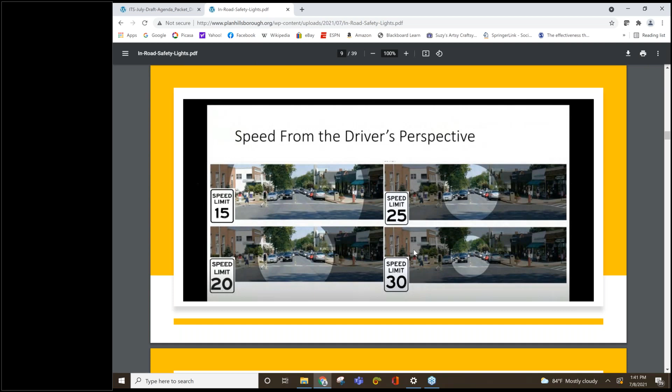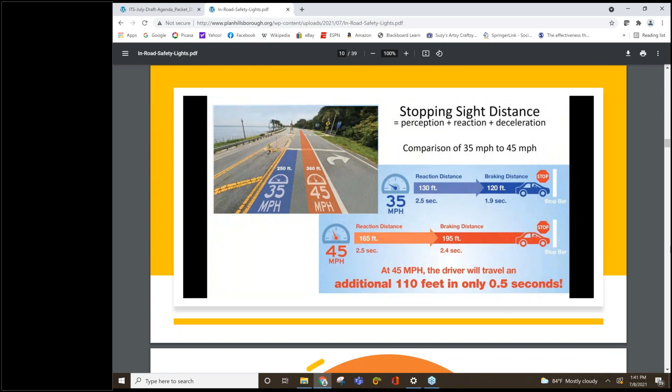In addition to the cone of vision, they have to have sufficient time to be able to stop. At 35 miles per hour, at 45 miles per hour, this is the distance that the driver needs - that's when they actually see the element in front of them. So this distance is very critical, because by the time they notice something, it's too late. We need to have the combination of that area of vision and also sufficient distance for them to stop.

So that's why we believe that conventional tools are not getting the job done. A perfect example is that many reports have been done recently, and conventional tools and design parameters that we're currently using are really not moving the needle. So we really need to start looking for new ways to be able to explore solutions to communicate better with the driver.

So innovation is a way to be able to communicate with the driver. That's what we are recommending here. We are also looking for tools that are self-educated, that are really very clear to the driver to know what they are dealing with. There are many other elements we are dealing with here in terms of quick installations, cost-effective, low maintenance, and then we are looking for sustainability.

The products that we are going to discuss here and the applications are FDOT approved and MUTCD compliant. We are proud as a state of Florida - we are the first state in the country to have these kind of tools being approved to be used on our streets and highways. So we are the pioneer state in this effort.

So combining the elements that we just discussed, I want to start first talking about pedestrian communication with the driver. This is that cone of vision, this is what the driver sees, and this is the distance that needs to be at least, to be able to stop. So we need to have 250 feet to be able to see that the pedestrian is crossing the roadway.

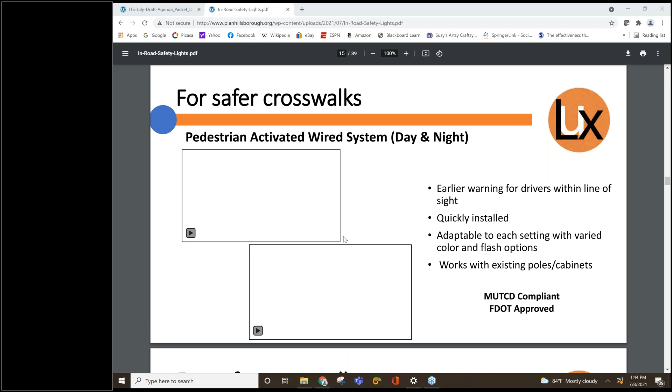I guess for this here, there are two videos I was going to show you of the system, but I don't think this is working right from your end to activate those videos. I will have to try it in PowerPoint presentation. I think when I converted it into PDF, it was not pulling up.

Give me a second. Yeah, sure. Yeah, the presentation, like you said, was a large file. Yes, it is, because the videos. Give me a second, it just opens. Sure, I apologize, I wish I had access to it. I'll make it easier on you. Oh, no, it's okay, fine. It's not a problem, I apologize for the delay in the time to open it.

But let me quickly advance to this one. I think it was around slide 12, 13, right? There you go, let's see. Oh, can you all see the screen now? Okay, thanks.

So the one to the top, that was in Escambia County where we did the application, and it is an existing RRFB system that we replaced with LED enhanced signs. We added in-road lights. The one in the video below it is in the city of Pinecrest area, and it is a combination with RRFB. That system has been in existence for almost 3 years now.

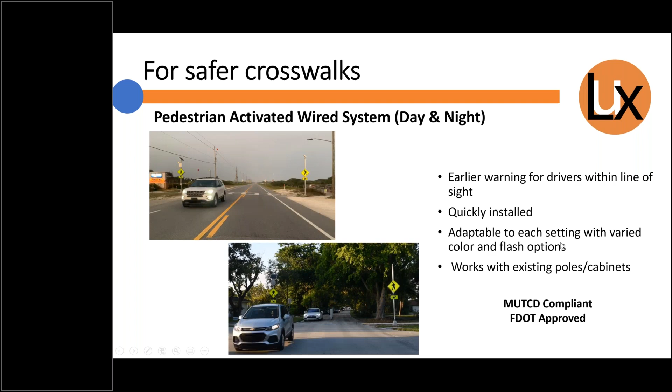This is, as I mentioned, the highlighted crosswalk. We can go to the next one.

This is a new idea that we are right now implementing, part of the innovation that we're discussing with District 5 in Orlando and central office. We're introducing red in-road lights at mid-block crosswalks combined with a HAWK system. This is the first in the country we're going to be doing that, so it's a new experiment we're working on with FHWA. There are about 8 crosswalks on Orange Blossom Trail in Orlando that will be using this combination.

Also, with this combination, we just got authorization with Hillsborough, with the Tampa Expressway authorities, on the reversible lanes where the gates are constantly being hit. We are going to be putting in-road lights just like that, but they will activate when the gates go down, and then be dark when the gates are up. This way, hopefully, it will provide better protection for the gate system. There is a video here, Bishka, you can play it please.

This idea, even though shown here with green, is from a different country where we started this process. The idea is to be able to look at many applications, like for railroads and for wrong-way applications. There's endless possibilities where we can use it, and signalized applications like for red light runners if needed, school zones, many applications we can use it for. But now we're introducing the steady red as an application in the streets, which is an amazing application.

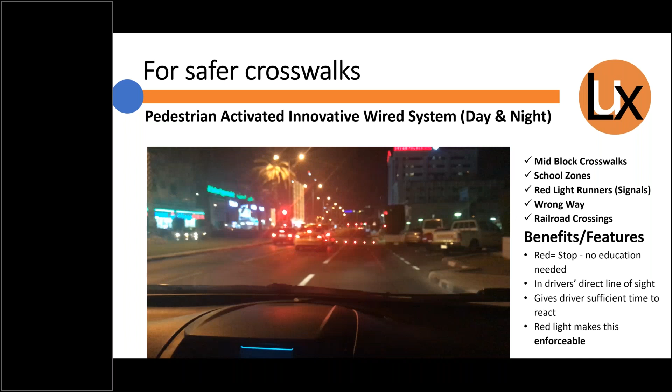That's what I mentioned to you about the combination with the in-road lights, where we are going to have flashing yellow at the beginning, then steady yellow, and then steady red in combination with the overhead lights, to allow for pedestrians to cross those mid-blocks on Orange Blossom Trail.

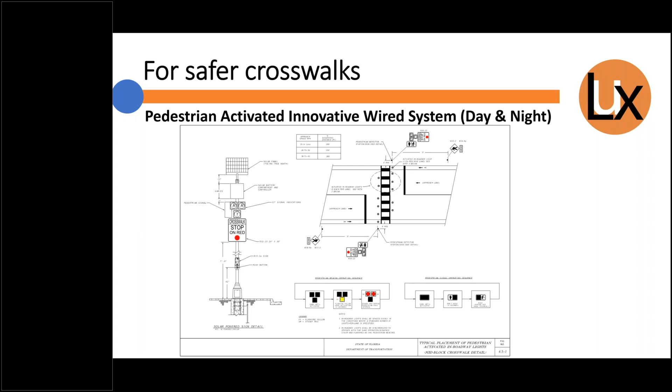Bicycle lanes, vulnerable users also - we have to be able to illuminate them and provide better protection for bicyclists when they're on the bike lane at nighttime. Most bicycle fatalities happen at nighttime. The white lights are placed in the bike lane, and you can envision a bicyclist with the red taillight in between the white lights, visible from 1,000 feet. This provides better protection, knowing that there is a bicyclist in the roadway.

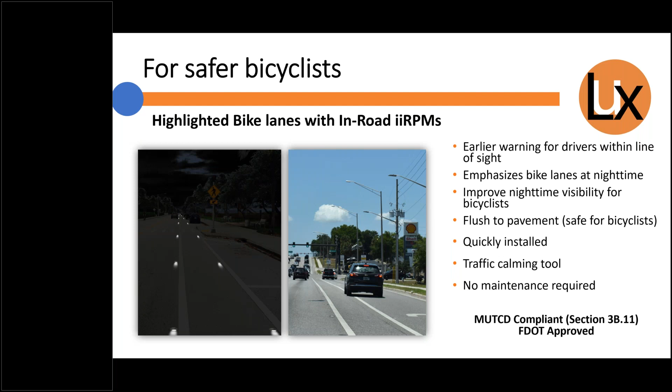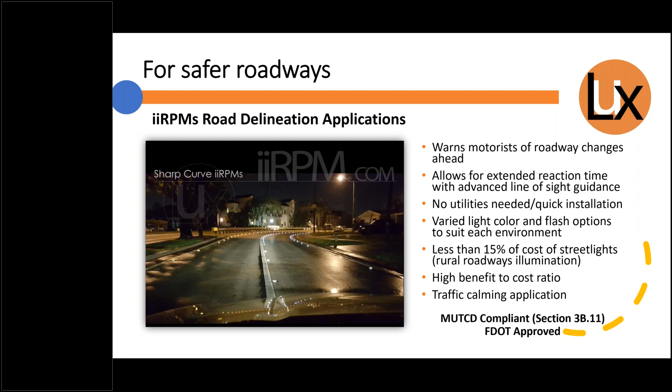This video is from the Florida Turnpike, mile marker 166, installed last year. There's a major problem - this is a dark roadway, and the curve has numerous roadway departure crashes. We took this video from half a mile away, traveling at 70 miles per hour without using our headlights. That's how we can navigate that curve very easily. It's definitely a very effective way to highlight and show the curve throughout those dark areas.

Wrong way application - I'm sorry, you can go to the next one. Oh, no worries, yeah that's good. Next slide, please.

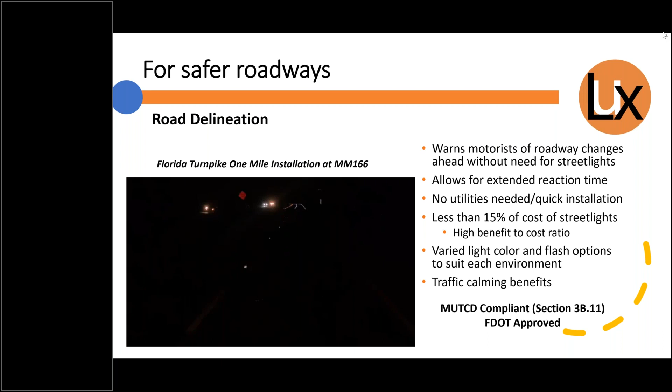Wrong way driving is a perfect example of distracted driving, aging drivers, or intoxicated drivers - they really can't tell the entrance from an exit on the ramp. It looks almost the same, and they could potentially enter the wrong way. So our objective is to create a gate system with in-road lights placed facing the driver, telling them from a distance that this is the wrong way to go, right there in their eyesight.

This application is very effective because it's active all night long. You don't have to wait until someone is in the zone to communicate with them. It's placed in the lanes for drivers - if you go the right way, you see absolutely nothing, and if you go the wrong way, you're going to see a bunch of red lights.

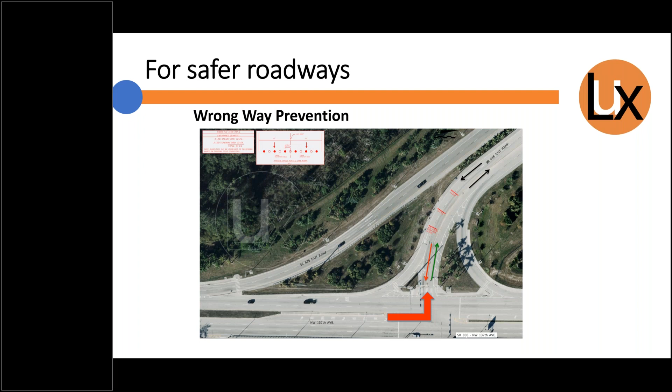That's how it looks - right next to the wrong way signs. It's a preventive way of being active all night long, so drivers can distinguish the entrance from an exit, and it can be used at many locations.

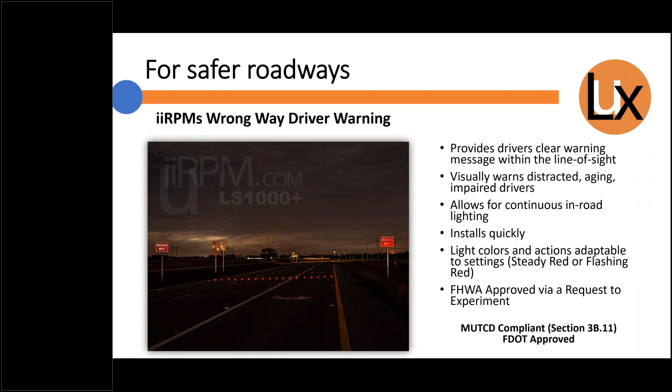This location, for example, we did in a rural highway up in the Fort Pierce area in East Florida for District 4. It's so dark there, and it's a large median - someone went the wrong way, and two girls lost their lives. So we placed this gate here to provide a better warning that can be seen, as I mentioned, from easily 1,000 feet, 2,000 feet.

Roundabouts, even though they are a very effective way of providing better protection for severe crashes, there's still a lot of problems with people hitting the roundabouts, hitting structures, and traveling too fast into them. So we have placed many roundabouts in the city of Miami Gardens, and this is also in a private development, where we placed the roundabouts to guide and warn drivers through the roundabout to navigate very easily.

Next one, please. How many islands, traffic separators that we can't see at nighttime also become a hazard. So this is also to be able to illuminate them and to warn vehicles of those areas. Next one, please.

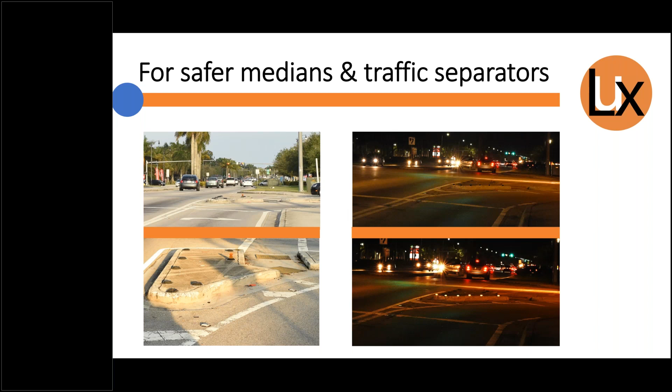Speed humps, speed tables, and as I mentioned already, incident management and railroad crossings, like I mentioned before. So many applications, and really I just wanted to give you a thought of how many applications we can use and what we have used so far. Our main objective, obviously, is to be innovative and try to warn drivers and reduce crashes. Next one, please.

What we have is a product that is 1.5 inches in depth that is placed inside the pavement. As you can see, this black composite cup becomes a permanent part of the pavement, while the cast aluminum and the module inside it that houses all the components can be ejected for maintenance or future milling and resurfacing projects. But most importantly, we have a one-piece module inside to protect from moisture, and that one-piece module can be placed practically in a pool, and it will survive and work out perfectly to protect the components. Next one, please.

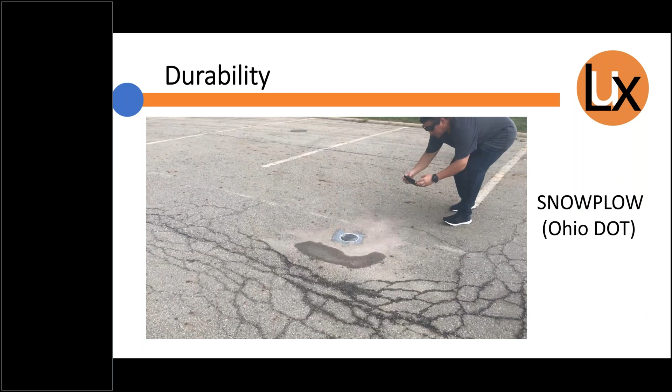Next one, please. We have many studies that have been done on the use of in-road lights. Two of them are related to us, and we are very proud of them. The Florida Turnpike, that 1 mile I showed you, the curve delineation, we did a before and after study with the cooperation of the Turnpike.

Another project we did, District 2 did up in Jacksonville. They have a reverse curve in the neighborhood, and we installed the lights. The 5 years before the installation of our lights, there were 56 total nighttime crashes, and in the 3 years after we installed the lights, combined, there was only 1 nighttime crash. So we are definitely on the right path of saying that we have a tool to help reduce crashes and also hopefully reduce speed. Next one, please.

Many references that we can share with you about the benefits of in-road lights. Next one, please.

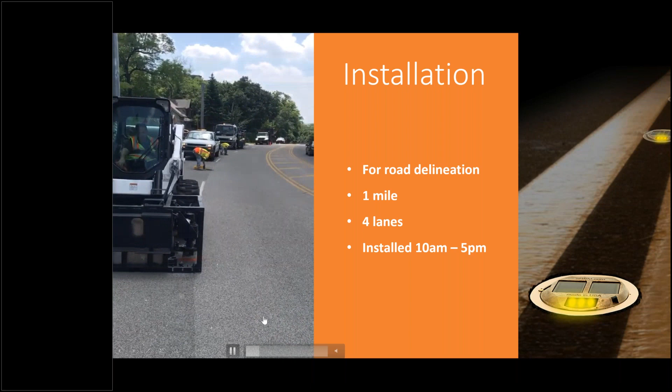This is also a video of the installation. We had to invest into the installation because the process involves drilling to accelerate. This is actual live operation, so we are drilling within 30 seconds. We drilled the hole to 1 3/4 inches. It's preset, the material is pulverized, and the person behind cleans up the debris, which can be thrown away because it's almost dirt.

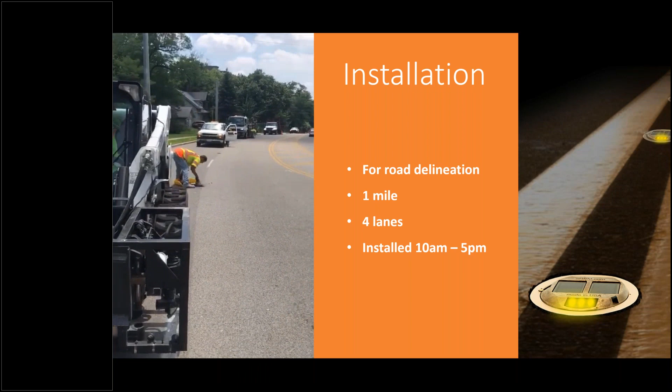But if it's in a neighborhood, we can accumulate it and then vacuum it. Then the person behind that, at the end, puts the epoxy material. It's a very effective epoxy—I'll show in the next video. Then the unit is placed, and within 10 minutes you can drive on it.

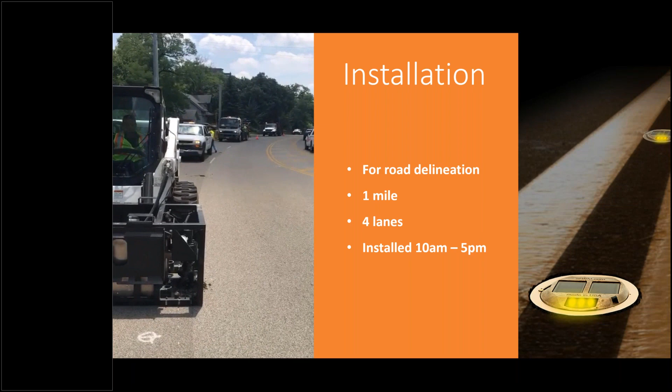As you can see now in this video, another hole has been drilled. Okay, next one please.

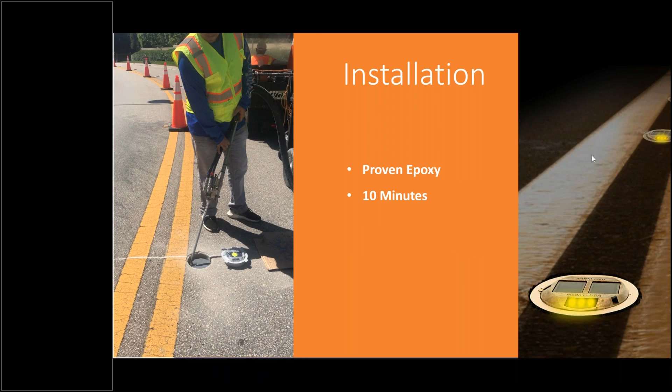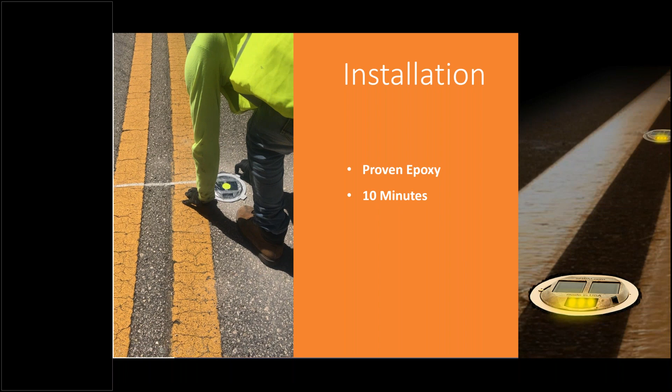This is the epoxy. This is a hole as it's being cleaned. The epoxy is a 2-part epoxy, and the unit is placed right there, and you have time to be able to adjust it, and then that's it—you're out there. Next one please.

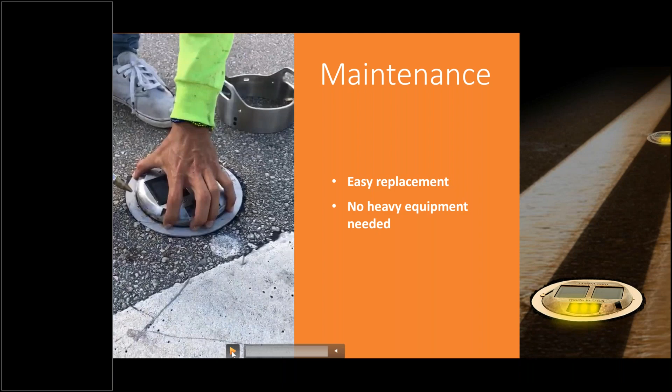This is part of the ease of maintenance: if we need to eject the unit, we use an air compressor that injects air inside the unit, and the unit pops up, and we'll be able to go ahead and come back and replace it. If you need to mill and resurface, which we've done on several projects, they eject the unit out and just come back, buy a new cap, and place it in the pavement at that time. You have to record it, obviously.

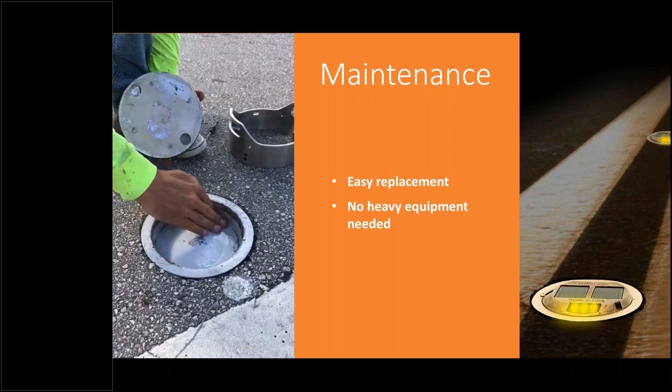This process, even though it seems easy here, is definitely not something a person can vandalize easily. We haven't had any problems with anyone being able to tamper with the units in the field. Next one please.

Our goal, obviously, is your goal too: to be able to address many areas of concern. We believe that throughout the state and throughout the country, we can reduce crashes, and we have many applications where we can be innovative in reaching out to the driver more effectively. As we all know, pavement shields on the highways have been very effective in advising drivers on which routes to take. In essence, what we're doing here is following those footsteps, providing better communication with the driver so they can see and navigate curves or be warned of pedestrians and other elements in front of them.

Next one please. So with that, I'd be more than happy to answer any questions. I just wanted to give you a bird's eye view of the applications of in-road lights.

Thank you, Will. That was a very good presentation, very interesting. Can we move on to any questions?

Yeah, Vishaga, this is Achilles. I had a question: what is the longest deployment you've had so far, in terms of time? We've been working for 7 years, and this is our 3rd generation of lights. Our 2nd generation has been in the field for 5 years.

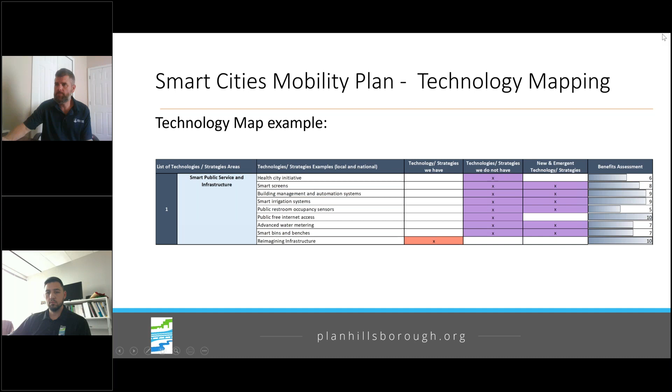I referenced the need to generate project ideas to feed the prioritization matrix that would drive the roadmap. I also mentioned the Alliance meeting we had last week, where we asked two questions of the attendees — about 35 to 40 people attended. The first question was: if you had $10 million and had to make improvements regionally, but only to existing capabilities, what would you do? The second was the same question, but only if you could add new capabilities. A number of project services and activities were identified.

Nick, I don't know if it's okay to have an open discussion now, but I'd really welcome feedback from the committee members around the projects listed on the right-hand side of the slide. Just briefly, are these the right ones? New initiatives — is anything missing? Is there anything we should be considering as a project team that needs to be added to that list as part of the overall approach? Would that be okay? Yeah, I think it's okay, if anybody has any comments or questions.

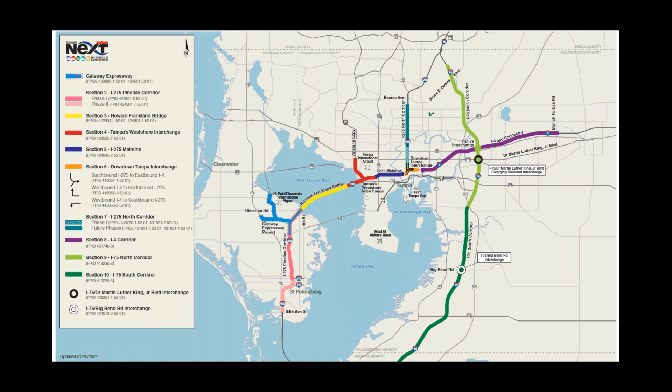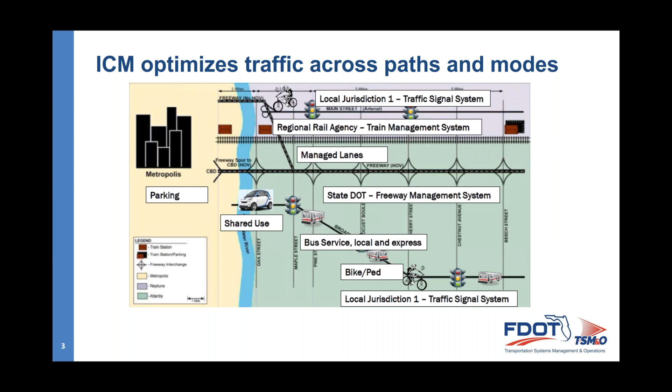Much like freeways being managed in a silo is not very effective, arterial management is much the same way, with spheres of influence that massively overlap each other. It really takes an integrated management approach for regional traffic management, both in the traditional sense and in the wider version of ICM, which this slide shows — broadening that scope to include other modes of transportation aside from just passenger vehicles, changing the focus from just moving vehicles to moving multiple modes, moving towards a mobility as a service mindset. Next slide, please.

These are just some broad strokes ICM benefits — a lot of this might be redundant to some of the audience. Hopefully reducing vehicle hour delay, improving travel time reliability through the metrics of planning time index and travel time index. And of course, the ultimate goal should always be to improve the overall safety of the region. Next slide, please.

Now I'll get into the portion of the presentation where I explain why this is not necessarily just about the Florida Avenue project. It could very well be, because a lot of this is still being actively discussed within the department — we've still got some requests we're waiting to hear responses on. So it's possible that these ICM corridors, shown on this map by FPID and main corridor, still roll out single project by single project.

But when the conversation of stimulus funds started getting brought up, and stimulus-worthy projects, we started discussing the idea of combining these ICM corridors together into a single project. Not only will we hopefully get a better economy of scale on the design or RFP development portion, but you'll get better consistency because it's a single firm writing each RFP. Given that these scopes are relatively the same — though there's some nuance to every corridor, so they'll be slightly different depending on needs and what other active projects have already completed — we're hoping we can package these together as one project and roll it out together.

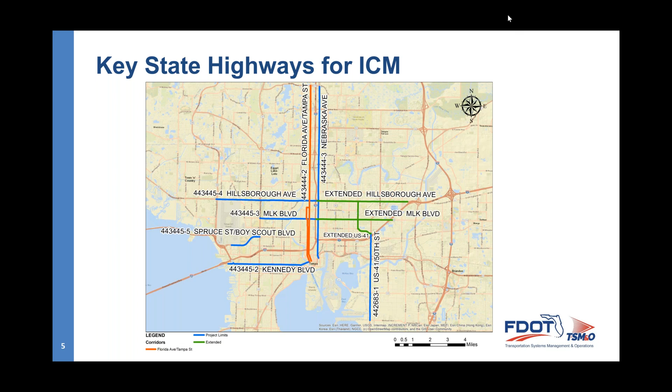Once again, this is information that might be a little redundant to this audience. ICM clearly has a focus on field intelligence. Some of the different systems we'll be deploying on these corridors — both Florida, if it goes out by itself, and of course all of them otherwise — are items you guys should recognize, if not by acronym, by name.

Some of these will be getting roadside units, controller upgrades — one of the recommendations from Lee's presentation — to get us to that ATSPM signal controller level. For those not familiar, that's automated traffic signal performance measures: higher density data. You'll be able to make more decisions based off this information than with legacy metrics like corridor travel time. It opens up a lot more opportunities to look at your timings and truly optimize them, as opposed to just trying to maximize throughput.

Bluetooth technologies will of course be deployed. Certain corridors, depending on strategic importance, will be outfitted with blank-out DMS signs for diversion, trailblazing, that type of stuff. And where we can, we want to try to get everything on fiber optic communications unless it's cost prohibitive to do so. Next slide, please.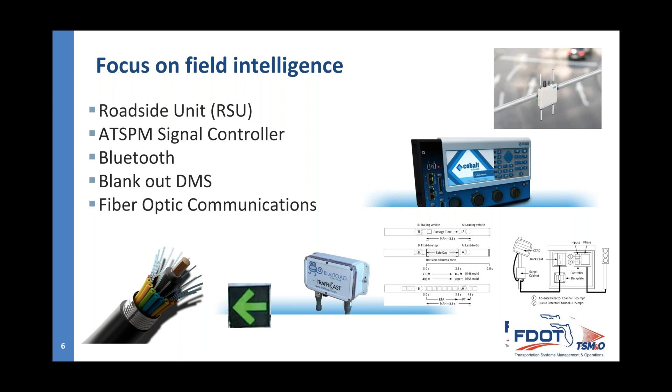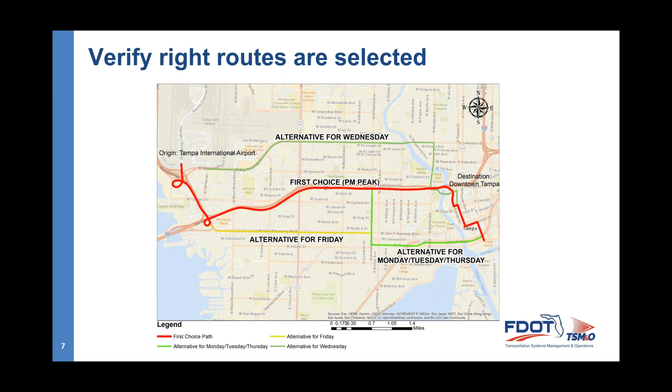This is another example of what we anticipate being able to provide to the motoring public. Most people don't realize it, but with specific enough information, there may be a better choice to take by day or by time of day. We know it's by time of day, clearly with AM and PM, but some of the nuances of this particular route being better for particular conditions is tough to get to, given the current metrics we have to measure these corridors.

Two of the major projects we have going on are very similar to this and will require a massive amount of coordination. We're hoping our ICM corridors, irrespective of how they actually get put on the street, can fill in whatever gaps these two important projects, both for the city and for the district, are going to leave, so we can have one cohesive system that functions together without redundant efforts. But that's 3D level chess at this point.

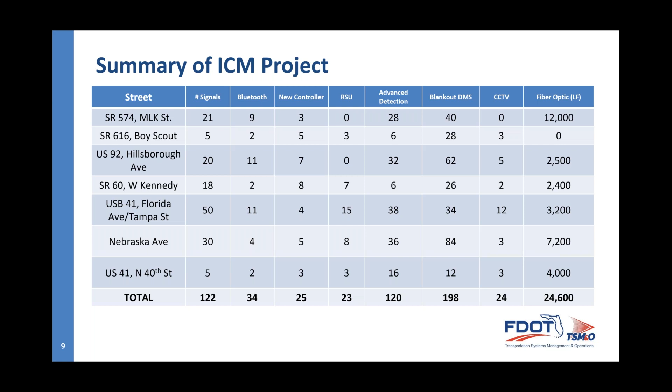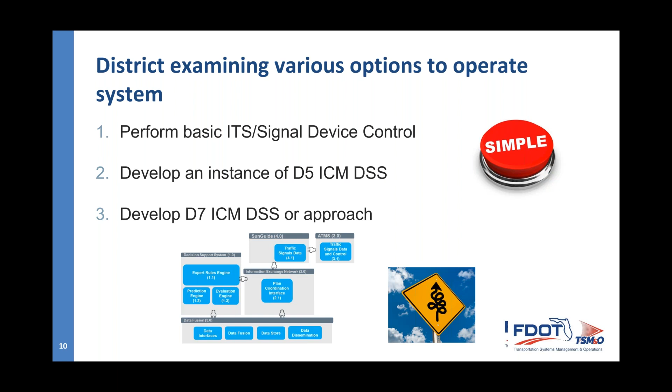We've also got some long-term decisions that still need to be made when it comes to ICM. We've got some sister districts - District 5 is already a little bit farther ahead in this process than we are, so they have an instance of a decision support system that we could develop for our own utilization, or we could come up with a District 7 specific decision support system. And of course, irrespective of both of those, the easiest option is just the basic ITS and signal device control, which we'll get from upgrading these corridors. But that's really the bottom of the pyramid - we want option 2 or 3.

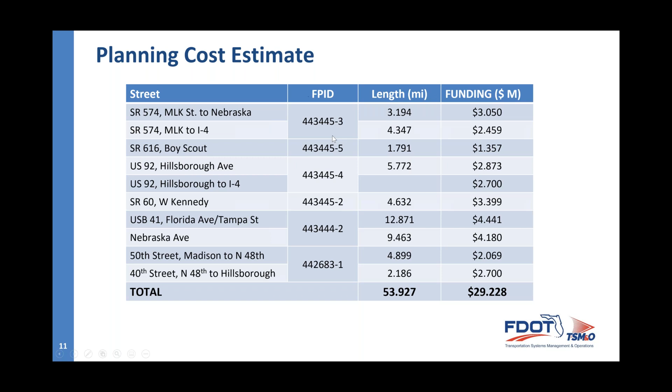Once again, take these dates with a grain of salt. This is us just trying to project where these numbers will fall, but that's all going to hinge on some of the responses we get back to requests. We had originally requested to procure each one of these ICM corridors independently as an adjusted score design build. When we started conversations about the stimulus funds and combining the projects, we requested to change that procurement methodology to a low bid design build, mainly for scheduling purposes, since a low bid design build doesn't require as many steps to award the project.

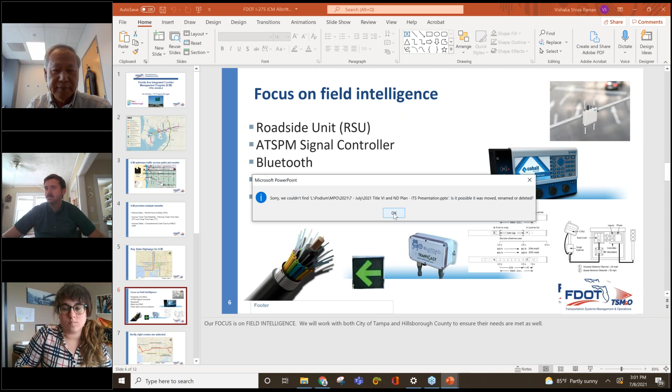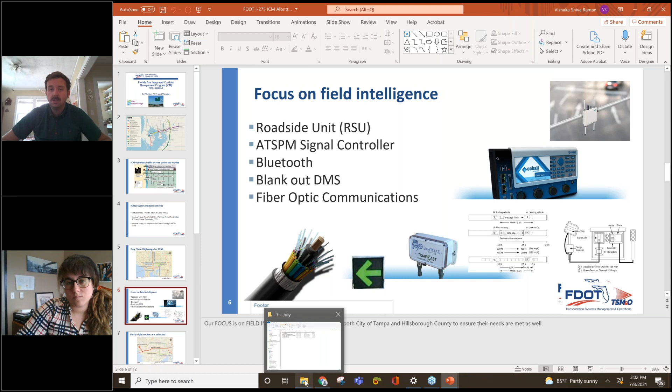All right, go ahead, ladies and gentlemen. Was it by any chance moved, Joshua? Josh, are you there? Yeah, I'm here. Sorry, hold on, I think the presentation, looks like I'm unable to open it from my end. Let me see if I can open it from the website. If not, let's see if I can open this. Yep, it's here. Is this good enough for you? Yeah, that'll do the trick.

Perfect, all right. Hey everybody, Josh Barber, TPO staff. I'm joined by Dana Lazarus, also Plan Hillsborough staff. We're here to provide an update on the 2021 Title VI and non-discrimination plan. Next slide, please.

Just to give a little bit of background, the TPO is required to adopt a Title VI and non-discrimination program in accordance with federal law as a recipient of federal dollars. The last plan was updated in 2018, and an update every 3 years is considered best practice.

Given the protests against racial injustice and the continued push for equity by the agency as a whole, executive leadership tasked staff this year with expanding the non-discrimination plan to include the activities of the Planning Commission and Plan Hillsborough as a whole, which works out because the Planning Commission is ultimately a beneficiary of federal dollars. The agency has a staff services agreement with the TPO where they agree to comply with Title VI and related non-discrimination authorities, and there's a significant amount of shared staff between the TPO and the Planning Commission, where the staff of the TPO are the transportation planning staff for the Planning Commission. So we share a lot of services together, and it makes sense for us as an agency to comply with civil rights laws, regulations, and executive orders across the board. Next slide, please.

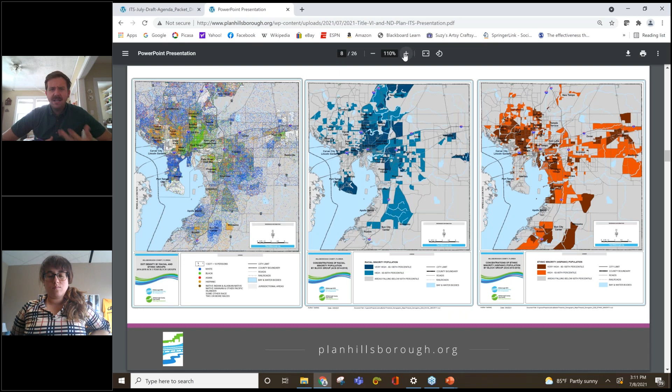Here's an example of some of those maps. These maps show race and ethnicity. The one on the left is a dot density map showing both race and ethnicity, where white people are shown in blue, black people are shown in green, and Hispanic folks are shown in orange. The maps on the right are threshold maps showing racial minority groups, that is anyone non-white, non-Hispanic, and further to the right is a threshold map showing our ethnic minority, or Hispanic and Latino, population. Next slide, please.